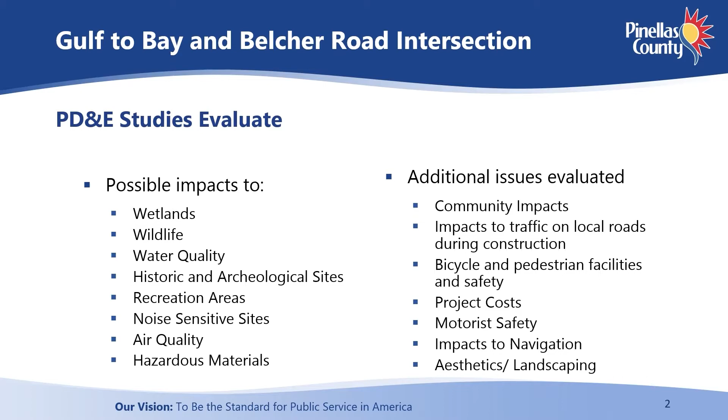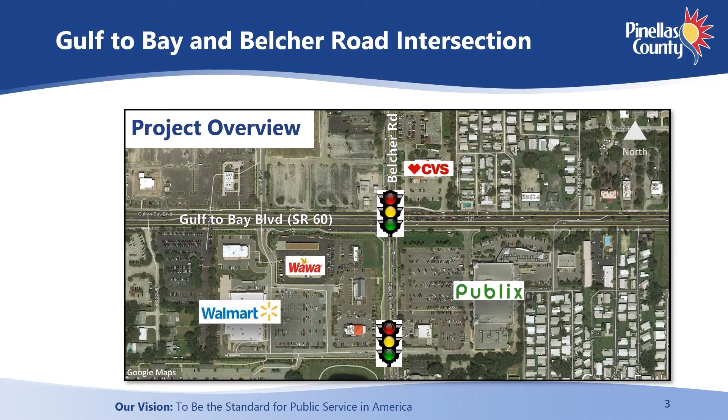The project includes the signalized intersection of Gulf to Bay Boulevard and Belcher Road in the city of Clearwater. The intersection is located along Gulf to Bay Boulevard, east of the beaches and downtown Clearwater, and west of the bay. The signalized intersection of Belcher Road with the Walmart and Publix driveways is located approximately 600 feet to the south. This intersection is also included in the study due to its proximity to the Gulf to Bay Boulevard and Belcher Road intersection.

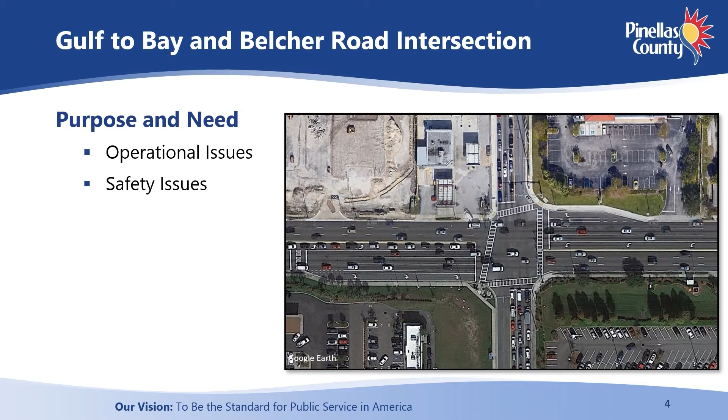The purpose and need of the study is to identify intersection improvements to address the existing operational and safety issues. The existing intersection of Gulf to Bay Boulevard and Belcher Road is experiencing significant queuing and delay. These operational issues will only worsen as the traffic volumes continue to increase. The intersection is also experiencing many crashes. In 2019 and 2020, 158 crashes were reported that resulted in 19 injuries. Rear-end collisions were the most frequent accident type, followed by angle and left turn collisions.

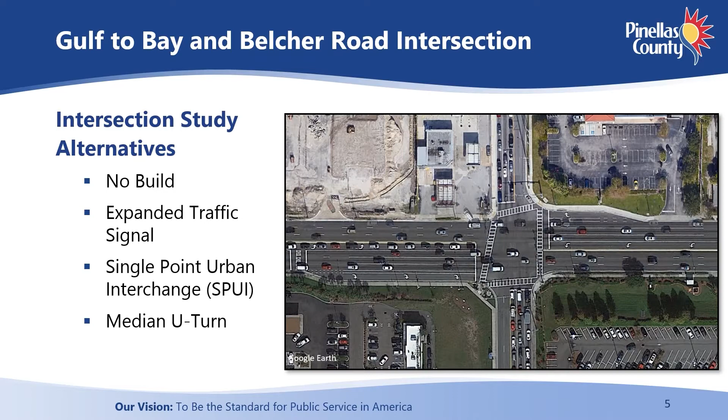Several intersection study alternatives were identified for evaluation. They include a no-build alternative, an expanded traffic signal alternative, a single-point urban interchange alternative, and a median U-turn alternative. The no-build alternative maintains the existing intersection with no improvements. Operations and safety will continue to worsen with this alternative. The comparison cost for this alternative is $0.

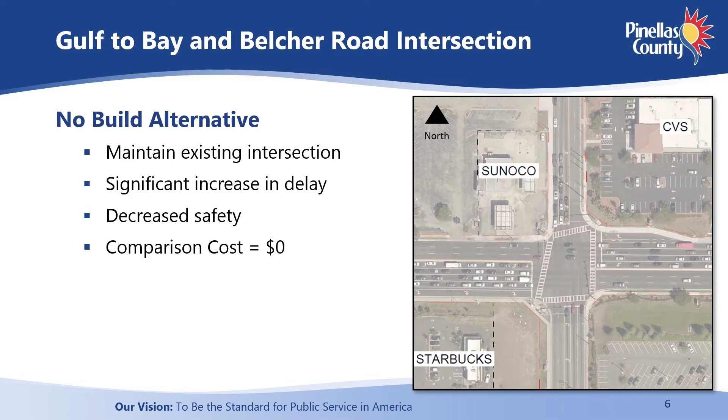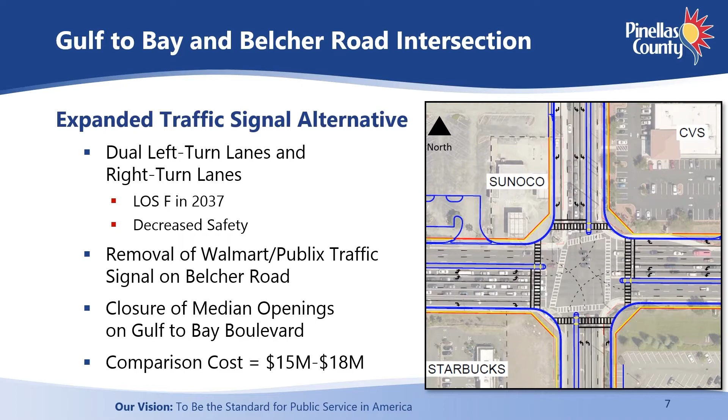The traditional approach when long delays and backups occur at an intersection is to add traffic lanes. The expanded traffic signal alternative adds dual left turn lanes and single right turn lanes at each leg of the intersection. This alternative was analyzed and is projected to result in a level of service F in the design horizon year of 2037, and will likely result in decreased safety due to the increase in conflict points. It also requires the removal of the Walmart Publix traffic signal on Belcher Road, as well as closure of median openings on Gulf to Bay Boulevard. The comparison cost for this alternative is between $15 and $18 million.

The single-point urban interchange alternative would construct a bridge taking Gulf to Bay Boulevard over Belcher Road, like the US 19 and Gulf to Bay Boulevard intersection, but with Gulf to Bay Boulevard being elevated. This alternative would improve operations by providing uninterrupted flow for traffic on Gulf to Bay Boulevard, but would have substantial right-of-way and access impacts to the adjacent properties. The comparison cost for this alternative is more than $80 million.

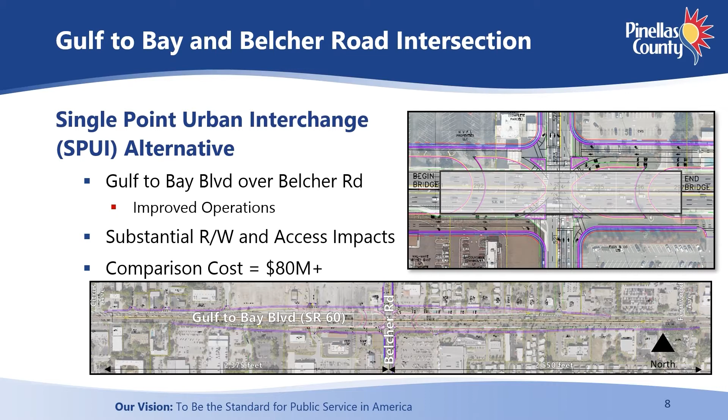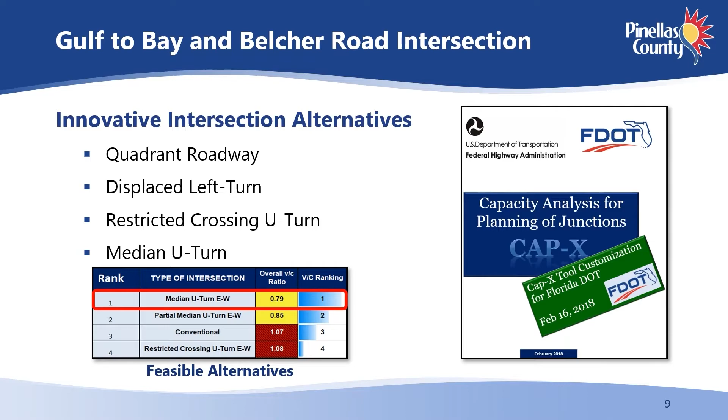Several innovative intersection alternatives were also investigated. These included a quadrant roadway, a displaced left turn, a restricted crossing U-turn, and a median U-turn. The median U-turn was determined to be the most promising alternative and was carried forward into the study. The following video explains how a median U-turn would operate at the Gulf to Bay Boulevard and Belcher Road intersection.

In their commitment to improve safety and mobility for all road users, Pinellas County, the City of Clearwater, and the Florida Department of Transportation are considering the innovative median U-turn at the Gulf to Bay Boulevard and Belcher Road intersection.

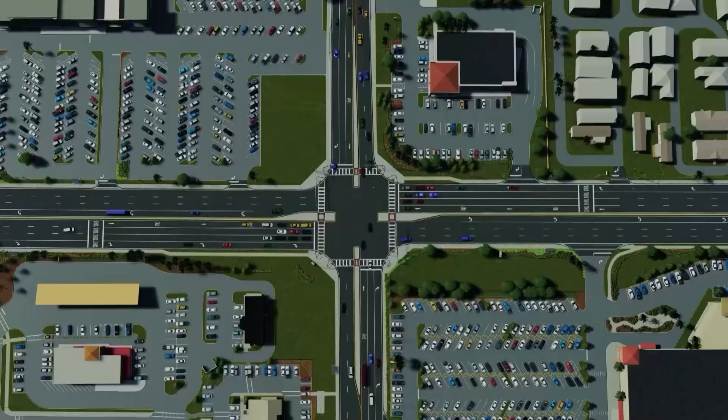The Gulf to Bay Boulevard and Belcher Road intersection is experiencing increasing user delay and crashes due to growing traffic volumes. To provide acceptable operations with traditional traffic signal improvements, traffic models indicate that additional through lanes would be required along Gulf to Bay Boulevard, which is not practical in this densely developed corridor. The innovative median U-turn alternative would provide improved traffic operations by removing left-turning vehicles from the intersection without adding through lanes.

Let's take a look at how a median U-turn will help to address the increasing traffic congestion at the Gulf to Bay Boulevard and Belcher Road intersection. The median U-turn will comprise one main signalized intersection that will look similar to what is there today, except with the left turn lanes removed, and two new signalized median U-turn intersections along Gulf to Bay Boulevard. Left-turning vehicles will be accommodated through one of the two median U-turn intersections.

The median U-turn intersections are designed to accommodate all roadway users, including larger vehicles such as school buses, emergency vehicles, and trucks. Median U-turns are easier to navigate for pedestrians and cyclists because of shorter crossing distances and larger refuge islands. The main benefits of the median U-turn are increased efficiency. Median U-turns eliminate left turn movements from the main intersection. This means that there are fewer interruptions and more vehicles can move through the same space more efficiently.

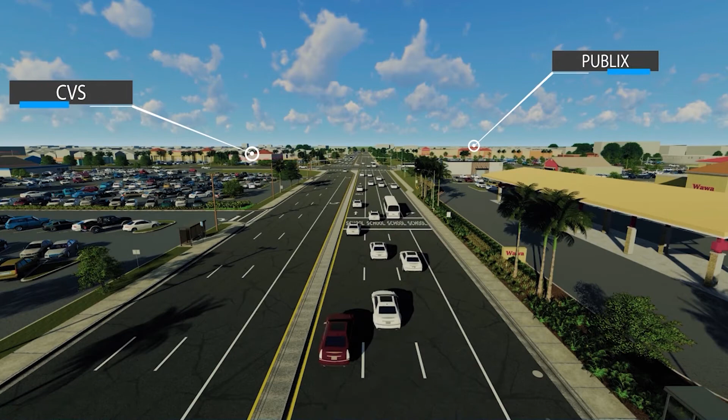On Gulf to Bay Boulevard, all motorists who wish to continue straight or turn right will proceed as they would through a conventional intersection. To turn left onto Belcher Road, motorists will go straight through the main intersection, make a U-turn at the adjacent median opening, and then turn right onto Belcher Road. Let's follow along as the red car demonstrates how a vehicle heading east on Gulf to Bay Boulevard would make a left turn onto Belcher Road.

As the red car approaches the main intersection, they will first continue straight through the main intersection in the left lane, then move into the median turn lane. Make a U-turn at the signalized median opening, move into the right turn lane, and finally make a right turn onto Belcher Road.

On Belcher Road, all motorists who wish to continue straight or turn right will proceed as they would through a conventional intersection. To turn left onto Gulf to Bay Boulevard, motorists will turn right, go to the adjacent median opening, and make a U-turn. Let's follow along as the blue car demonstrates how a vehicle heading north on Belcher Road would make a left onto Gulf to Bay Boulevard.

As the blue car approaches the main intersection, they will first move into the right lane, make a right turn onto Gulf to Bay Boulevard, then move into the median turn lane. Make a U-turn at the signalized median opening, and drive straight through the main intersection and onto their desired destination.

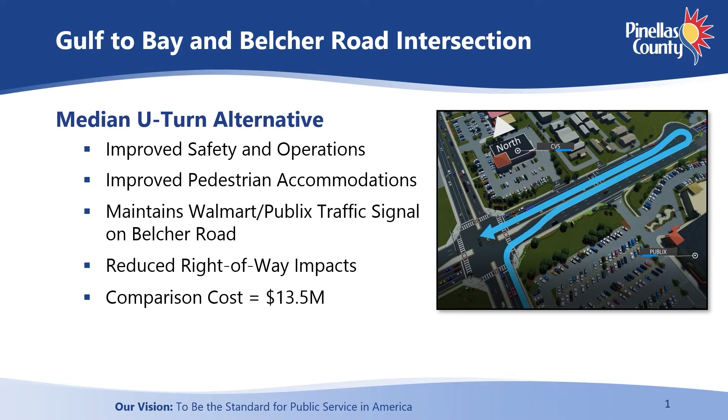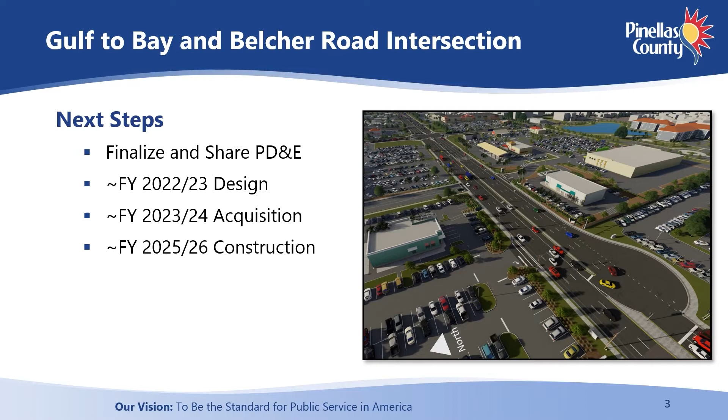Next steps. County staff will share the public feedback from this public meeting with the Board of County Commissioners. The PD&E study will be finalized. Design of the project will begin in fiscal year 2022 and 23. Real estate acquisition will take place in fiscal year 2023 and 24, with construction taking place in fiscal year 2025 and 26.

Thank you for attending this presentation on the Gulf to Bay Boulevard and Belcher Road intersection improvements project development and environment study.

So now we're going to introduce our panel of experts, and then we'll move into the Q&A portion of the meeting. And first, from Ayres Associates, we have Consultant Project Manager Hisham Suna. Well, welcome. Thank you for introducing me. I'm Hisham Suna, Consultant Project Manager for this project with Ayres. And I look forward to receiving your feedback and input and hopefully answer some of your questions tonight.

And also from Ayres Associates, we have Transportation Services Manager Kevin Kulo. Kevin, please say hello and tell us about your role in the study. Yeah, hi there, Kevin Kulo with Ayres. I'm the lead designer on the project, so I was the one who developed the different alternatives, and as well got involved with the operational analysis and comparison of the alternatives. So I'm here and looking forward to helping answer any of the questions that you have. Thanks for joining us. Thank you.

And Kevin, I did want to ask you one clarifying question from the presentation. When discussing the expanded traffic signal alternative, you said this approach would result in a level of service F in the design horizon year 2037. For those who may not be familiar with that terminology, could you explain that a little bit further?

Sure. The level of service is used to describe the quality of how a transportation facility operates. So similar to school, a level of service or a grade of A is better than an E or a D or something like that. So a level of service A is considered the best quality operations, really off-peak hours where you're free flow going through the intersection with very little delay.